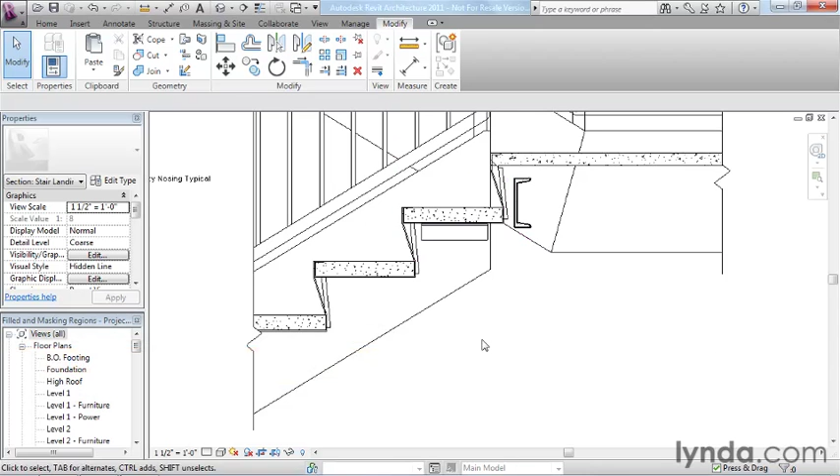Continuing on the topic of working in details in Revit, in the previous two movies we saw creating a callout view, and then we saw adding detail components on top of the callout view to begin embellishing design intent. In this movie we're going to look at a few more tools to embellish the detail, specifically filled and masking regions.

Before we do that, I want to point out a couple of changes you might see on screen compared to the previous file. This file is called Filled and Masking Regions, and I've added two detail components: an angle running this way and a channel item running this way. Both are available in the out-of-the-box detail library, the same location where we found the stair tread. Feel free to import these yourselves. All I did was place them in the model where I wanted them to go.

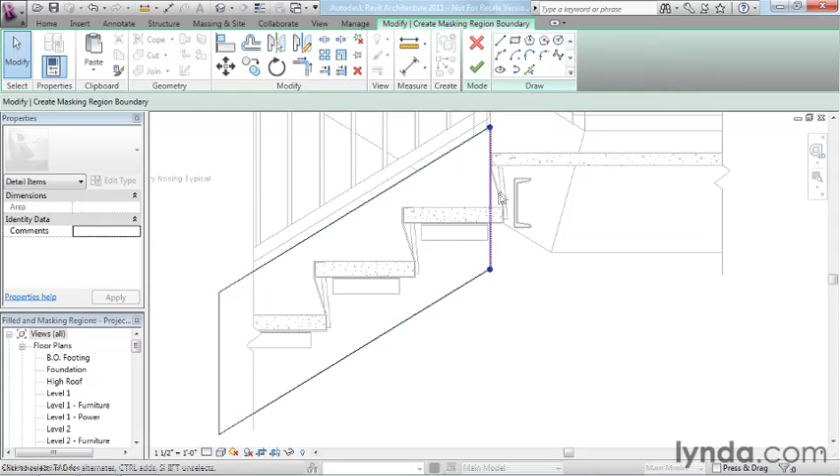I want to show you a nice benefit of having this as a grouped array: when I select the array item, I can choose Edit Group. I've positioned this angle where I want it, but I actually need it underneath each stair. Rather than creating a separate array and manually copying it, all I need to do is open the first array group, which is already spaced properly, click the Add button, click on the item I want to add, and finish the group. Just like that, we'll have that support angle added to all the other treads as well.

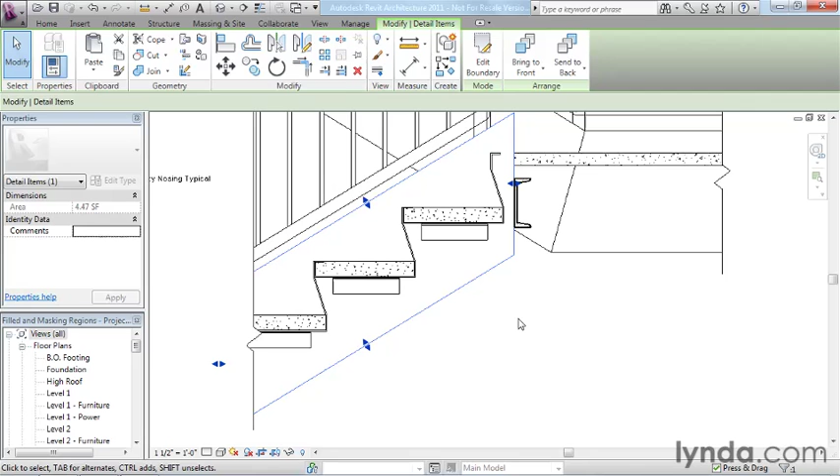But you can see the tread design we're using here is a little different than the underlying stair model. Rather than go in and edit the model to try and make it match, what we can simply do is draw a two-dimensional version of the stringer here to cover up the underlying model geometry that we're not interested in seeing.

To do that, we go to Annotate, then Region, and choose a masking region. A masking region is just that - a region that masks out the underlying geometry underneath. In fact, we've already seen an example with this break line we used over here. That break line has a built-in masking region. I could just draw my lines, and you see Revit does a pretty good job of snapping directly to the underlying geometry.

Or I could actually use this to save myself a little bit of effort. I'm going to choose Pick Lines, and I'll pick this line and this one. I can even pick the vertical if I like, but it's not quite in the right place. And then for this final one, I'm just going to draw outside the crop somewhere.

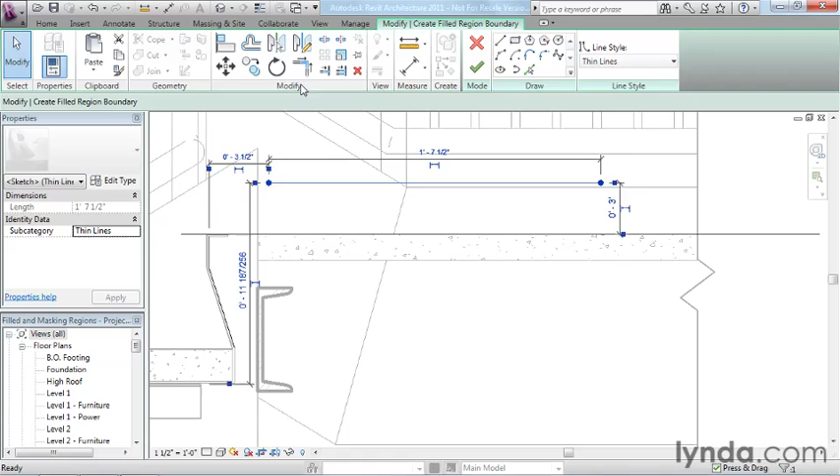So let's clean this up. I'll do Trim, and Trim. And then for this guy, I can just move it to where it needs to go. You'll see how it'll actually snap to that underlying 2D component that I placed there. Presumably I put that component in the correct location, so I can use that to snap to.

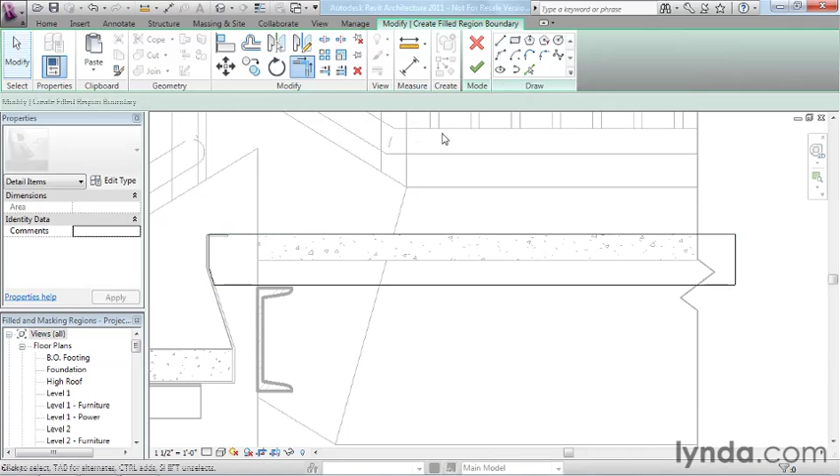I could even lock it so that if I realize the channel needs to move around a little bit, it will automatically move the edge of the masking region with it. That can be a little handy thing to do.

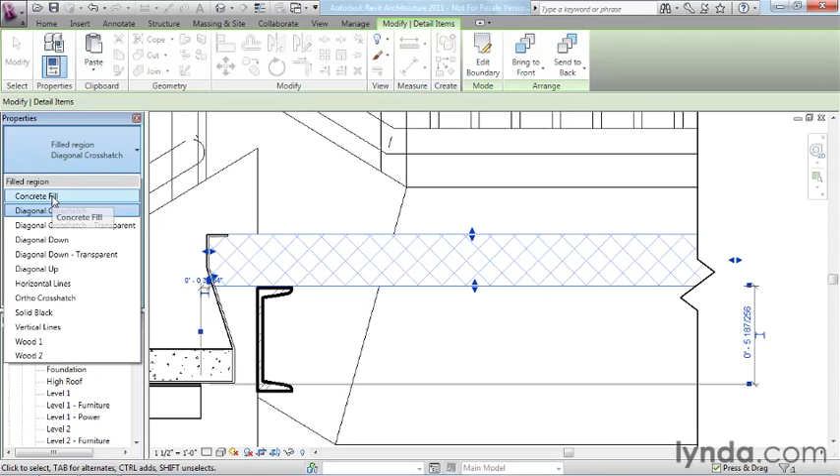The only caution I'd give about locking elements when working in a detail: you might be tempted to lock the treads to the underlying treads and so on. You might later be working in a floor plan view, make a modification, and Revit will throw up an error message telling you it can't satisfy the constraints anymore and that it's got to remove them, or some other cryptic message. You might not be sure what it's talking about. It could be something as simple as locking this line to the underlying stair, but now because of the new configuration of the stair, that lock is no longer valid.

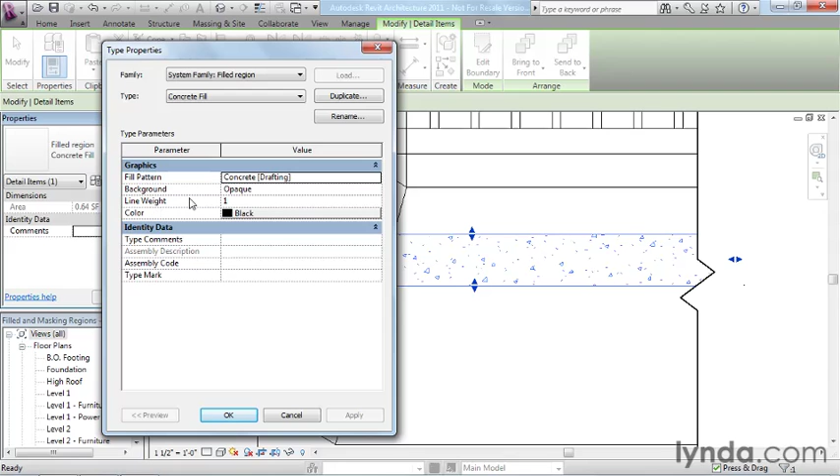Well, that's a pretty innocuous thing, and I could easily just say okay, unconstrain it, and come back and fix the detail. But if you're not sure what it's trying to tell you, it can be a little scary to get a message like that. So just use some caution when applying constraints and locks. Just because you see a lock doesn't mean you have to click it, right? Try to be judicious about it and click them when you get the most bang for your buck.

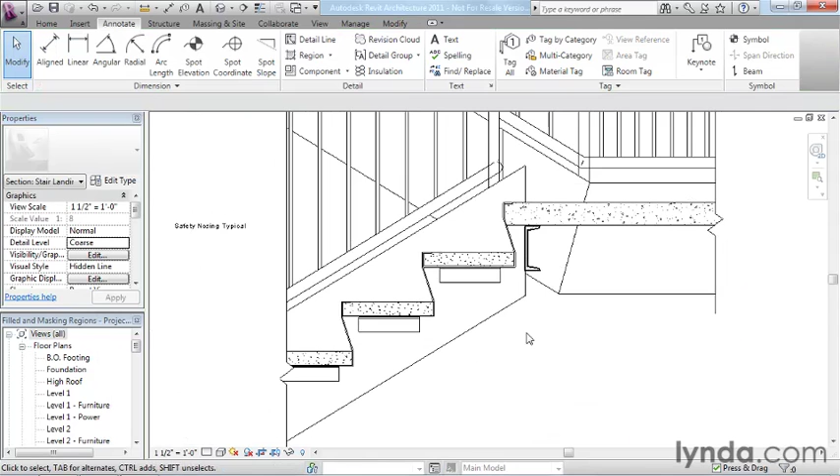All right, so I'm going to go ahead and finish this masking region. And so there you go. It's masking alright, but it seems to be masking just a little too much, right? Well, no worries here - we have our Arrange buttons on the Modify tab, and we can easily shuffle these things around. All we have to do is click Send to Back.

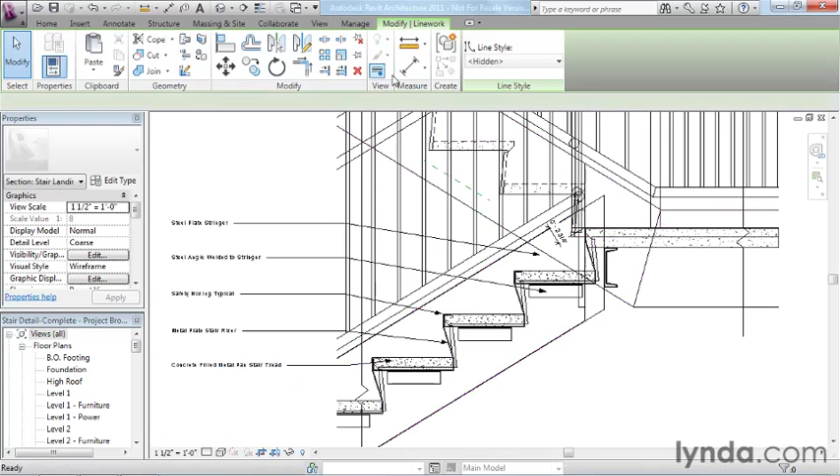Because it turns out that any regions or any 2D components - so this includes both our 2D detail component families and our masking and filled regions - all of those sit on top of the model. So even if you send it all the way to back...